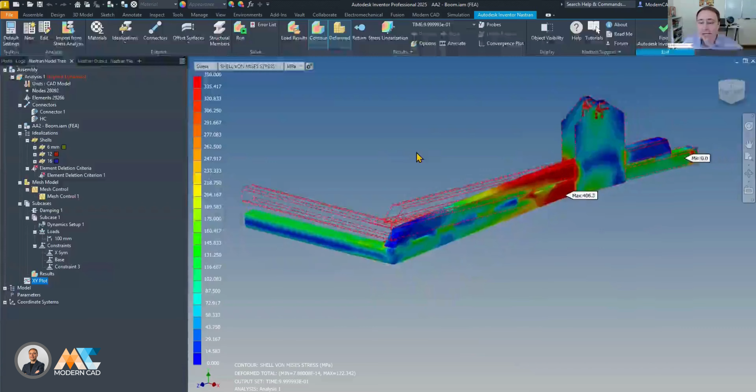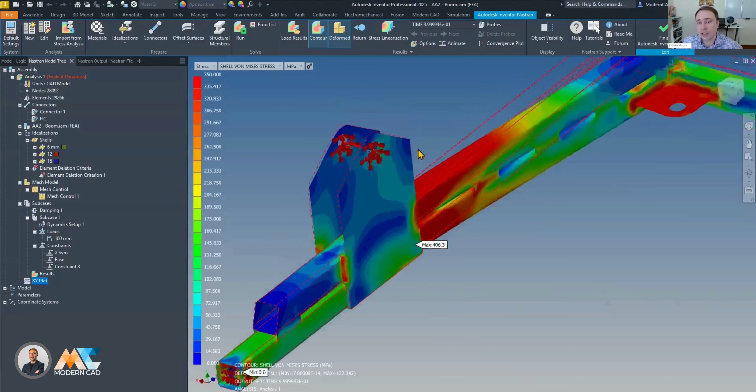What I did, I took this model here and I defined some basic constraints. So I enabled some rotation, kind of realistic constraint on those bolted connections here and there. I just fixed those two parts, made them static, of course taking into account the actual angles of those constraints. And this is what I obtained from the dynamic simulation. And then I applied 100 millimeters enforced motion or imposed motion on this lug.

So let's have a look at the force. I am interested in the hydraulic cylinder load. And this load comes from the reaction force at this point here. So let's have a look. I'm going to create a new plot, point to this node here, and then plot results from time 0, that's my starting point, so no load, to time 1, which means end of my simulation.

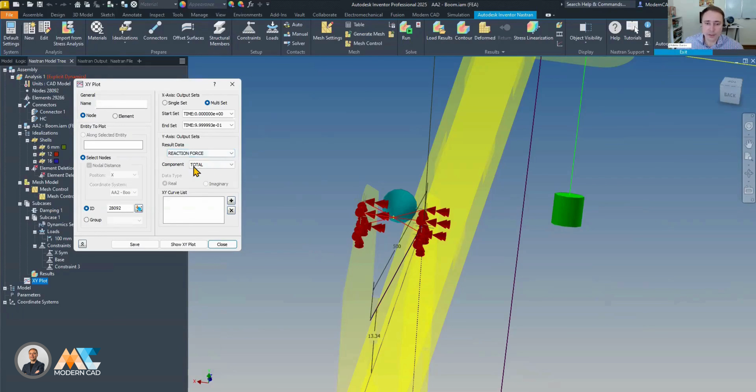So the result I'm looking for is reaction force, the total value. As you can see, it has just 1 degree of freedom fixed, so the total value will give us the actual value on that constraint. So let's have a look. So yep, that's the plot.

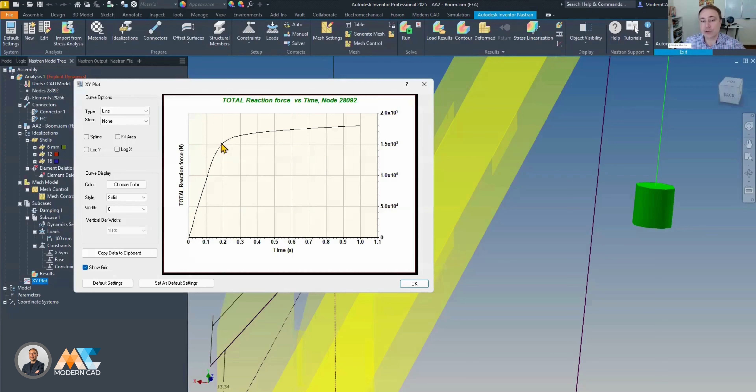The plot looks pretty realistic because I used non-linear material here. It's mild steel 1020 with 350 megapascals yield stress and 400 and something megapascals ultimate stress. So anyway, we can take a look at the results here. Yes, 420 megapascals ultimate stress with the maximum elongation at break 15%. So this non-linear material model enabled the actual reaction force required to bend this.

And as you can imagine, the reaction force is non-linear because at some point we are experiencing plastic deformations in the most critical part. That's why the responsiveness of the whole model towards this enforced motion becomes different. The model becomes softer due to the formation of the plastic joint in the place where we have the maximum bending moment. So that's why at some point we have linear connection between the applied load in millimeters, so 1 means 100 millimeters, up until the change in the behavior when a very insignificant increase in load leads to dramatic deformations in the model.

So in terms of the stress capacity of the part, what can we conclude from it? As you can see, up until like 120 kilonewtons on this side, we don't experience pretty much any plastic deformation, so it's a linear connection. We can make some research in detail to find the weakest spots, but it's completely okay to run within those limits.

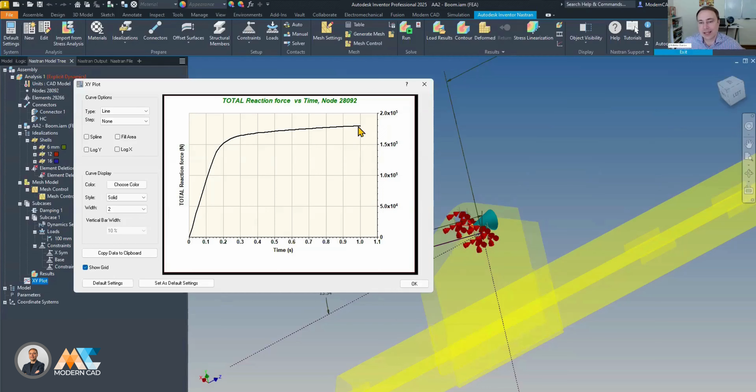But around this point here, which is 150 kilonewtons, the situation changes dramatically. As you can see, if we increase the load or go beyond 150 kilonewtons, the model deformations increase really seriously. So probably the maximum we can get out of this model is about 180 kilonewtons. And after this, it's going to collapse because the model becomes so soft, the plastic joint increases so dramatically. So it's just the maximum it can take.

So let's have a look at the plots to find out where the problems are and what are the possible ways to improve this model. The first thing is the stress. Unfortunately, we don't have the equivalent stress available in those results, and that's why we need to be careful with von Mises stress. As you know, it doesn't work beyond the yield point, so the maximums we're going to get in the von Mises are not quite right. But all the way before yield, it's perfectly fine. So that's why we are going to determine the areas affected by the yield stress.

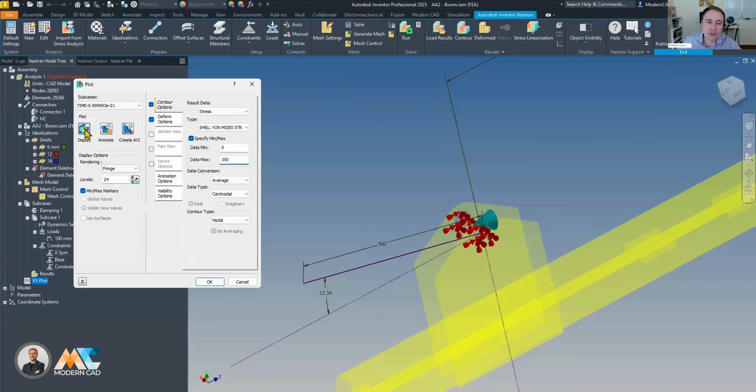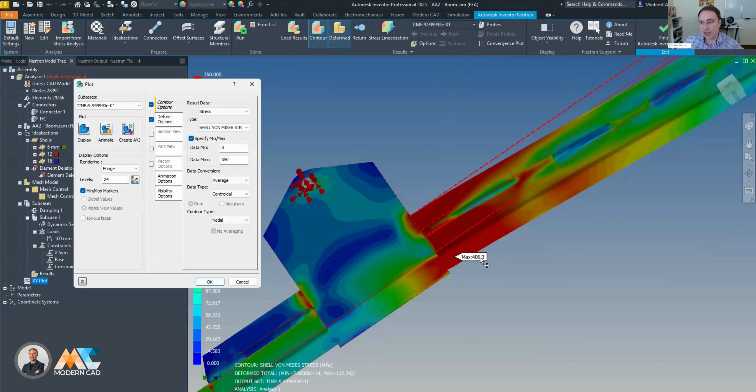So what I'm going to do, I'm going to set my maximum to 350 megapascals, set deformation as actual, so it's 100% scale, 1-to-1, and then just display the results. So that's what I expected. All these red areas are affected by the plastic deformations. The maximum is here. And even with the von Mises stress, it's not exceeding the maximum stress, which is 420 megapascals, which confirms that the model is still operational, but it's very close to complete collapse.

In some areas, the plastic deformations significantly affect the welds. In this model, the welds are presented as just some small pieces of material using shell elements. That's why those welded connections might need some extra analysis later, but at this stage it's okay just to understand where the weak spots are.

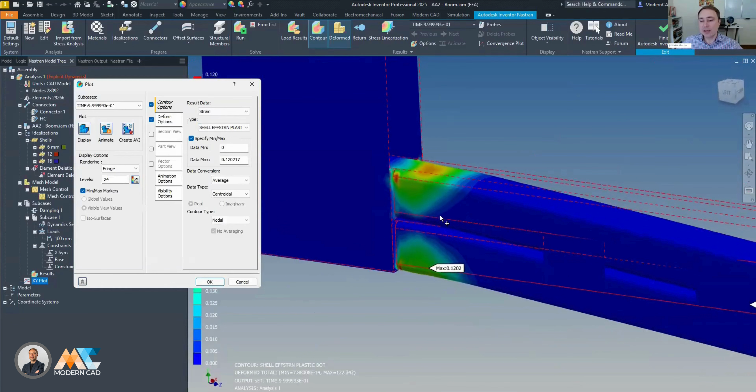The next bit is we can analyze strain and see the actual areas dramatically affected by the plastic deformations. As you remember, the maximum we can get is 0.15, so 15% before it breaks. It seems like there are no areas in the model where we have values higher than that. Plus, I specified the element deletion criteria, so it will actually break if we exceed the maximum. However, it didn't happen.

Models like this can give you a pretty good understanding of your concept. You can find out the areas affected by the plastic deformation, and understand that despite some imperfections in the model, it can withstand way higher loads than actually designed.